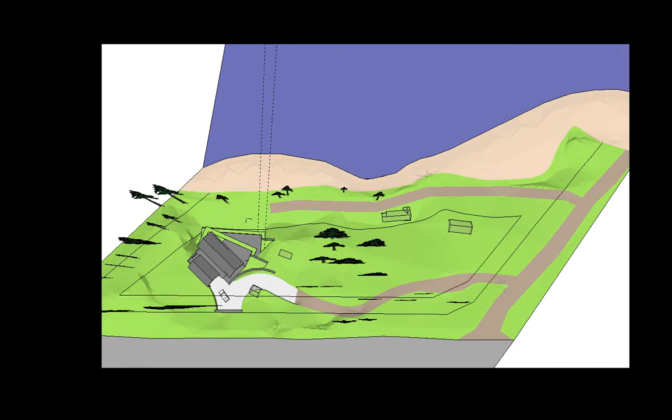So this is what it looks like from the top. We've got pretty interesting features. We've got the upper driveway coming in here, so there'll be one area to park cars, and we also have a lower driveway with access to the suite and the workshop. So this is the view from above, and the magic really happens right about here. We're just going to fly into this, and boom, have a look at that.

So that's kind of what we're talking about here with the house. It's a tiered house, it kind of fans downwards, and it pivots around this corner here, which is awesome.

All these windows on the front are facing the ocean, so it looks fantastic. We're really excited about the integration of the landscape here, where we can actually walk off of each of the decks onto the land itself. Here we have a typical normal patio, and then they're proposing some green roofing where it shows in green here, so that could have a really nice effect and have the house just really feel like part of the landscape.

So what we've got here is on the top floor, that's sort of the main entrance to the house, and that's living room, dining room, kitchen, pantry, pretty straightforward, just one big giant open room, which is really cool. Downstairs we have...

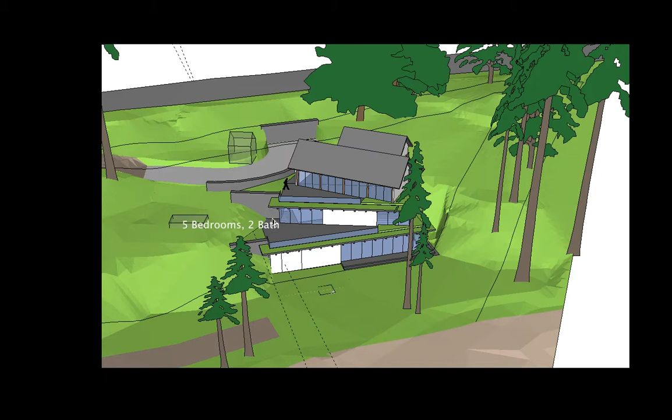Five bedrooms, so the master suite might be in this corner here, but we're not quite sure yet. And then down below we have a two-bedroom suite, and then a large workshop area, sewing room, and that type of stuff.

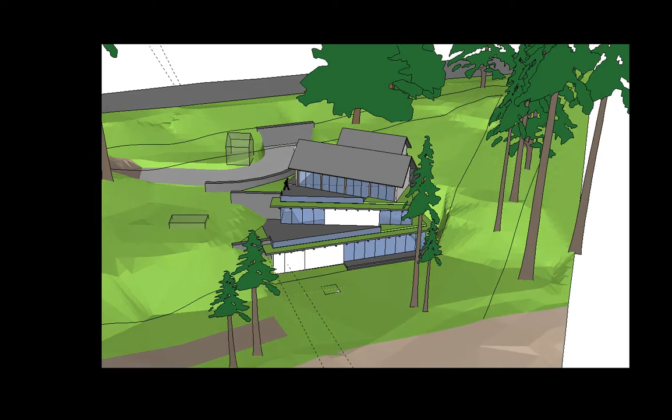So now we'll just flow through some of the different options here for the looks at the building, just to get a perspective of how the house integrates into the landscape and what it looks like from various perspectives. Here you can see these diagonal decks where you have the green roof on certain areas, lots of corner windows.

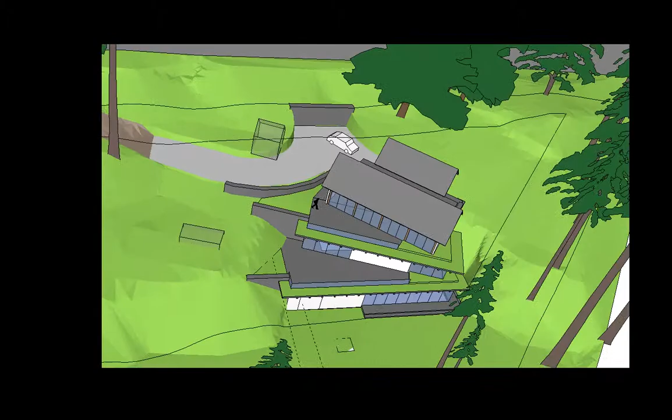So this will be the new entranceway, kind of a nice windy road through the woods, coming up to the house. This greenhouse right here is not going to be where it is, but so you can see as you come up, you'll see all the timber framing through the glass on the front. You'll see the decks, have a nice view of the ocean as well.

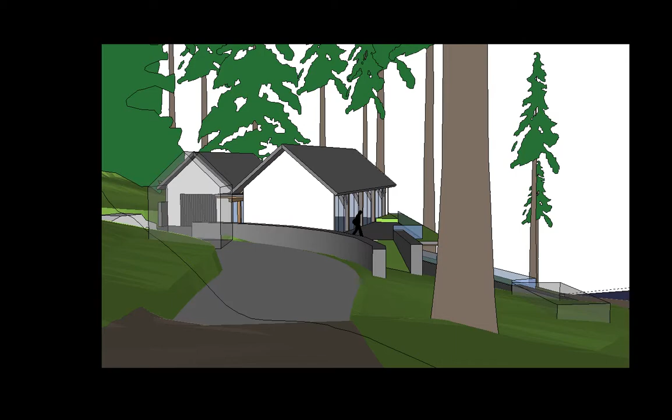One of the things that's important with the house, because of West Coast Road being where it is, having the house located so it blocks the decks provides privacy as well as noise reduction.

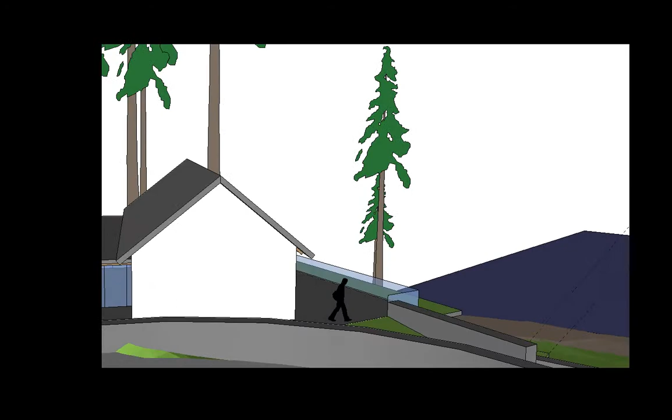Pretty epic view from on the patio, from in the house at all levels. Tough to beat that. It's one of my favorite looks here, as you kind of traverse down the slope and really get to feel for how the house integrates in there.

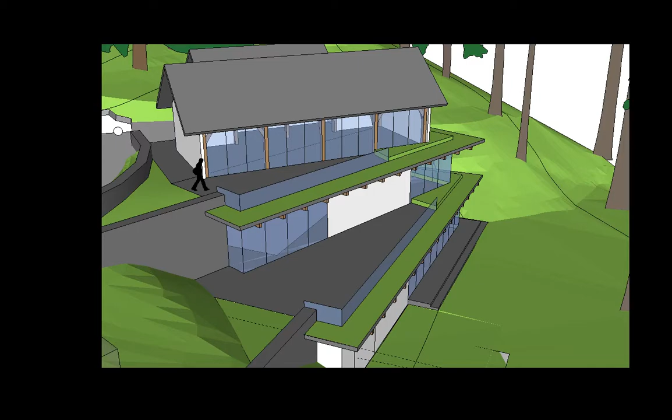One of the things we wanted was when you're on the deck itself, on one of these patios, that you don't see the building down below. You want to be able to see the beach and see the ocean, and I think we've achieved that. So here's just a close-up view of what the actual house is going to look like.

Now at the back there's another entrance here, which will come off to a small garden up in this area of the property, which is where there used to be a garden before.

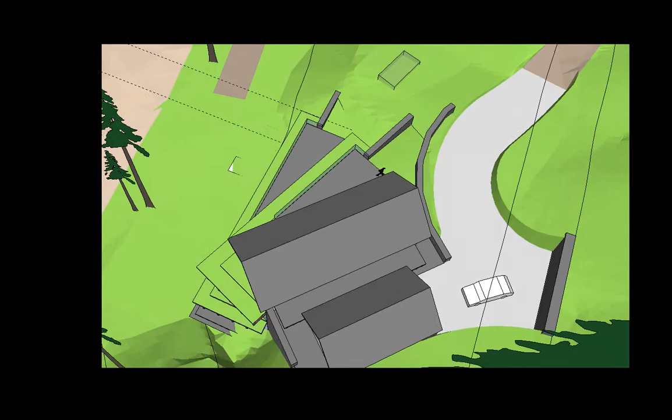Now here's an idea of a concept layout for the actual floor plan of the house, and this again is that fan design. So at the driveway entrance here, you'll see the main entrance to the house that also goes into the garage.

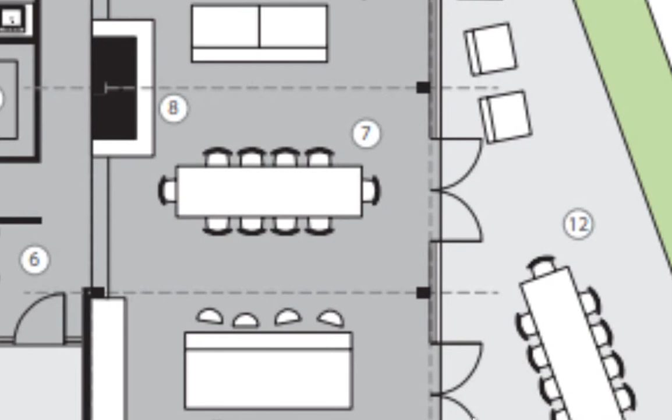Then we've got the kitchen here, a nice L-shaped kitchen with a big island, an entrance and exit onto the patio where we could have an outdoor dining room. Then we have our formal dining room in the middle here. Again, amazing views all around.

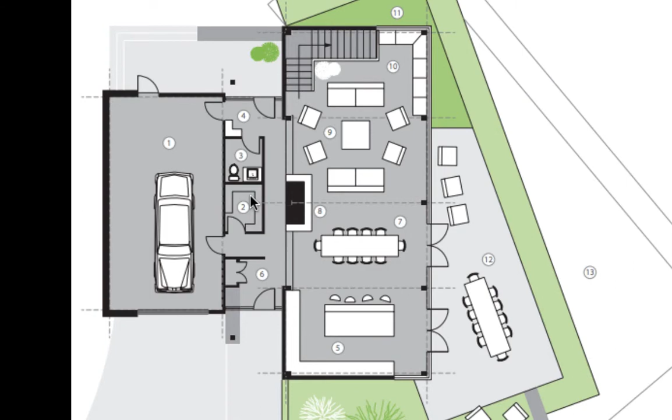Proposed location of the fireplace, then a large living room with a built-in corner seating area. Pretty slick design. In the back we've got a pantry, we've got a washroom, we've got another entrance to the house.

So that's all we have so far, and the other floor plans of the house will come together as we formalize our design.